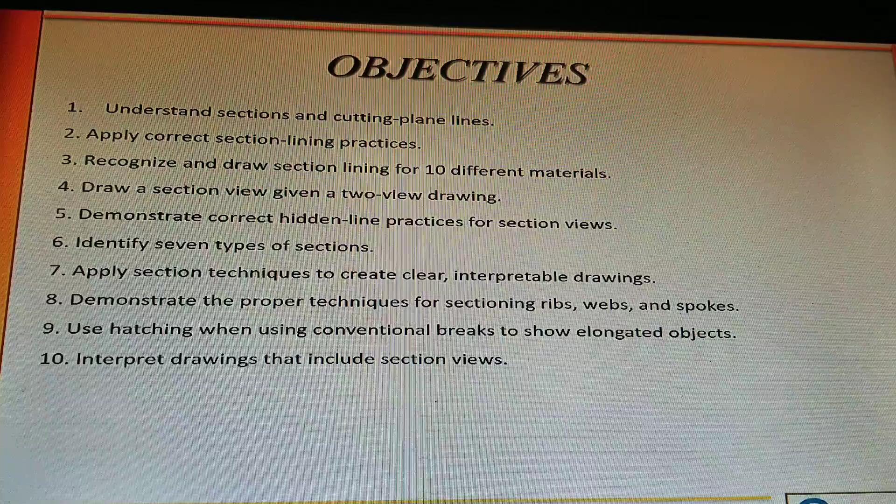Understanding sections. Section views are used for 3 main purposes. One is to document, design, and manufacture single parts that are manufactured as one piece, to document how multiple parts are to be assembled or built, and to aid in visualizing internal workings of a design.

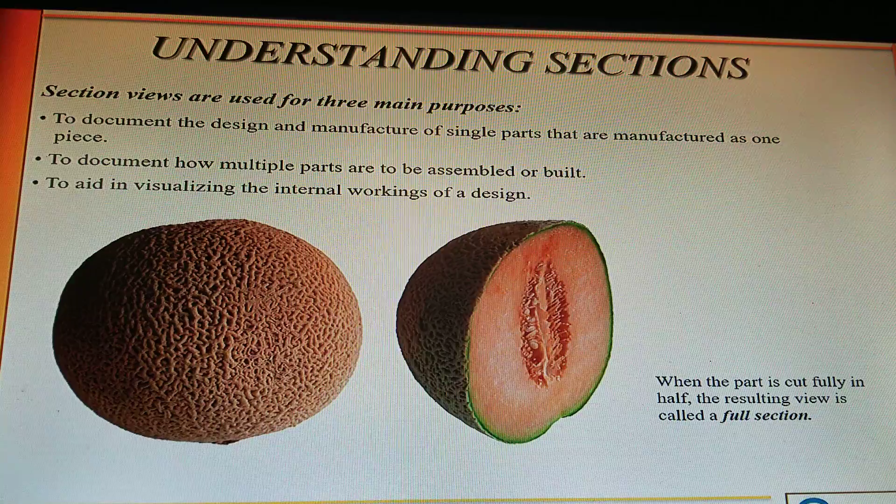So what they've got here is a melon, and they basically cut it in half. By cutting it in half, it's called a full section. So that little bit where the seeds are, that little hollowed out place, that would be an opening. And then around it, where the meat of the melon is, that would be your material. Okay. So this primary purpose is to be able to show the reader what something looks like on the inside without using hidden lines. Okay, it's a little bit more visually effective that way.

Make sure my camera's doing okay. I got 50 minutes. I don't know how long this will last. I'm doing it with my phone.

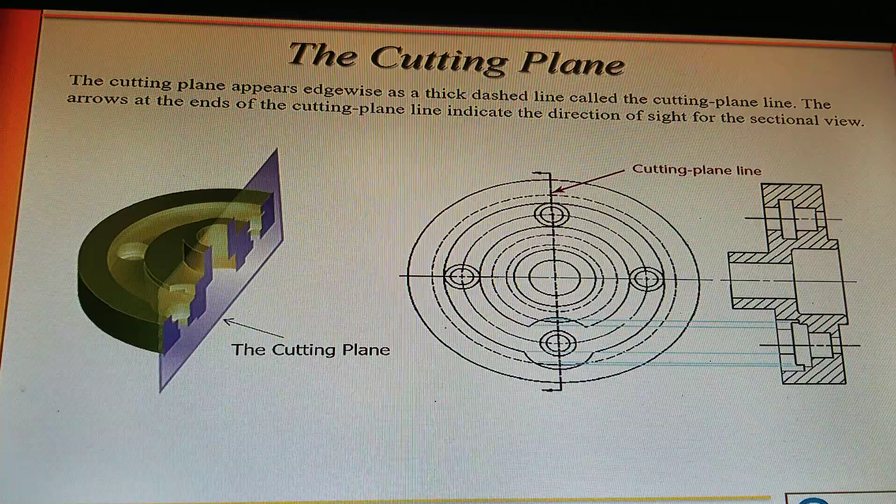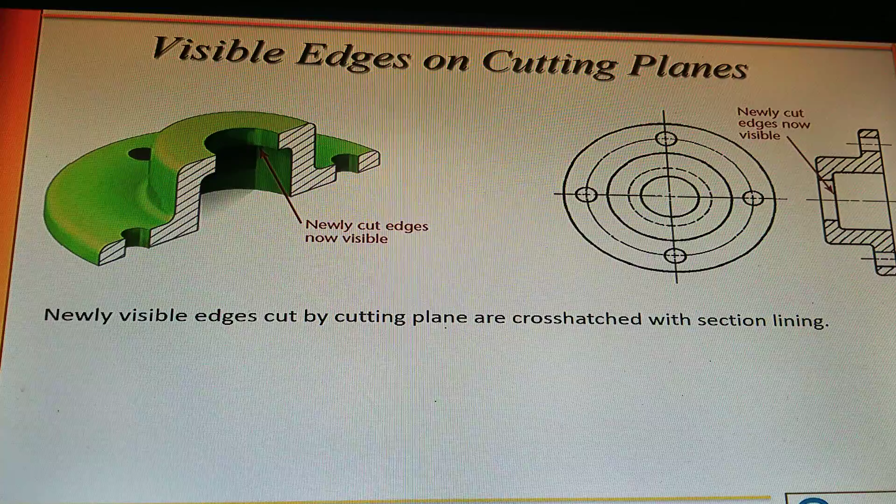Hold for a second. This is not very professional. I had to stop and get me a bottle of water. So my mouth is getting dry because I talk too much.

One of the things you got to remember: in drafting, these are called section lines. In AutoCAD, it's called hatching. So remember that.

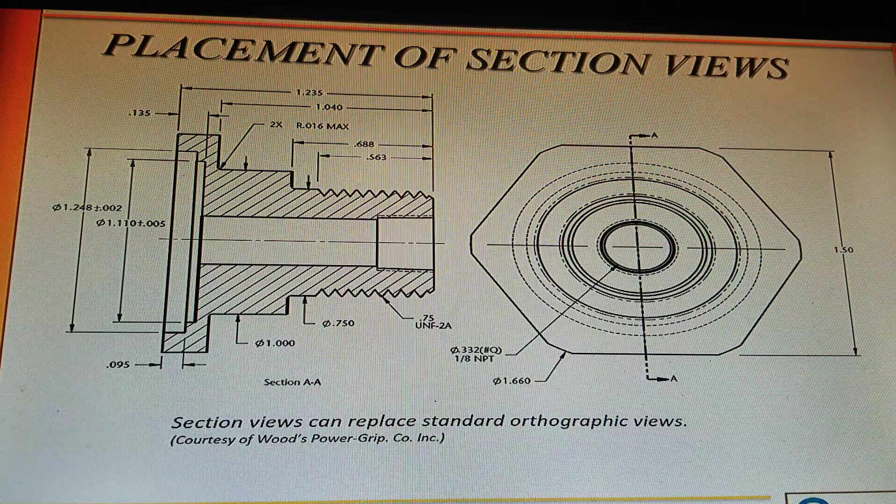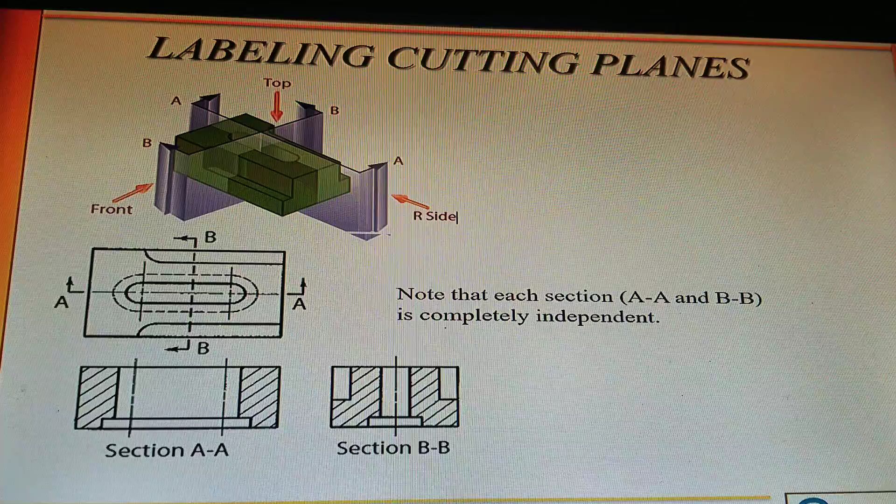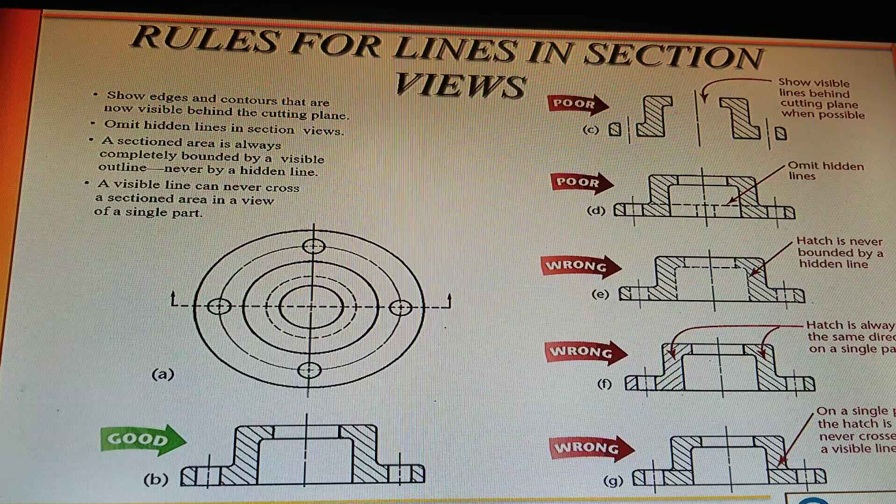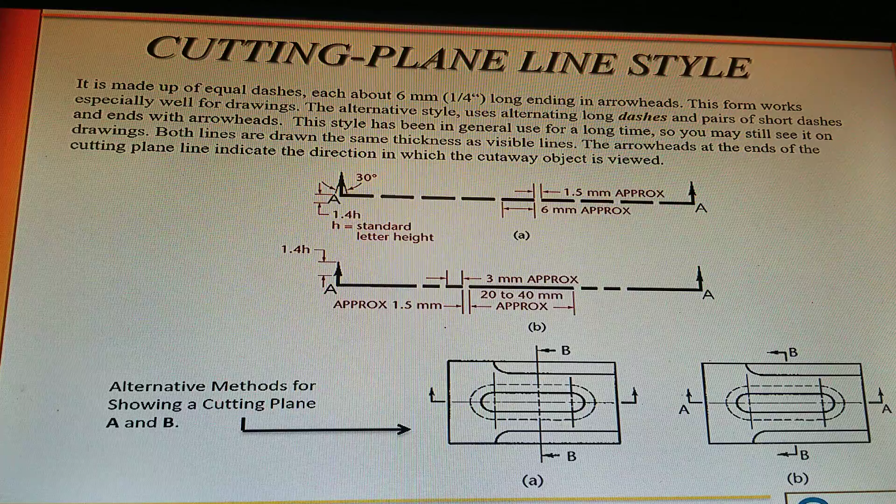Okay, some more do's and don'ts. One on the left is good. Look at the isometric above, and then look at your orthographic drawing, which has got a front view and a side view. In the middle there, it's wrong because you've got your arrows turned, and the isometric drawing should be on the left instead of the right.

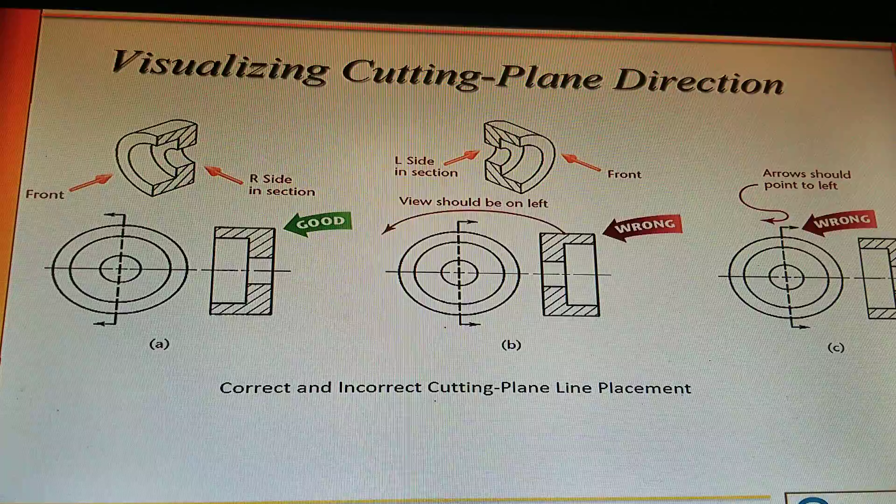And then on the right, on letter C, you've got your arrowheads pointing in the wrong direction. Okay, this slide basically pertains mostly to your old board or manual drafting days. AutoCAD pretty much takes care of most of these issues.

First one is uniformly spaced by an interval of about 2.5 millimeters, not too close together. Uniformly thin, not varying in thicknesses, distinctly thinner than visible lines, and neither running beyond nor stopping short of the visible outlines. So if you look at the right there on top, you see the correct way of drawing section lines or hatching on a section drawing.

Down below, all the no's, that's just different ways, especially back in the olden days, these would be things that would happen when you're drawing with a pencil. Spacing gets irregular, drawing lines too close. Now, even in AutoCAD, you can have them spaced too close together, so you got to watch your spacing. But pretty much, I think the default takes care of that too.

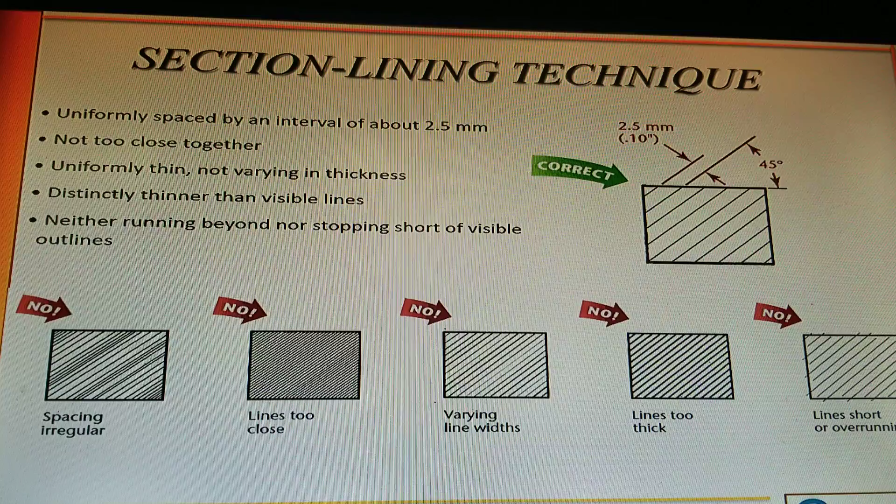Section lining technique continued. When you got some weird angles in your drawing, things are going to happen. Most of the time, your section lines or hatching are going to be at a 45-degree angle. But because of this weird angle in this part, they've adjusted the section lines to a 30-degree angle instead of a 45. In the middle there, they don't want your section lines to be parallel to the outline. And the last one, lines should not be perpendicular to the outline either.

Down below, they got best practice when you're dimensioning. When you're putting extension lines and dimensions, you'll learn more about that in chapter 11 when we do dimensions. You put your dimensions down below outside the sections. In the middle there, it's okay, there's a way of doing that, but try to avoid that if possible. And then on the right hand side, where your section or hatching is crossing the dimension, that's a no-no. Don't do that.

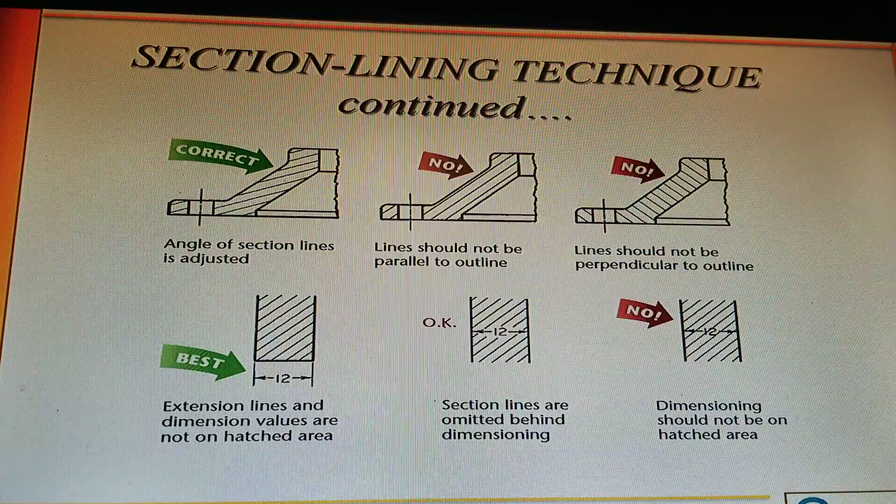Now, even in the old manual board drawing days, you could do this, but it takes a lot of time. In AutoCAD, all you got to do is pick one and click on it, and it'll make your sections. So these are different symbols for different kinds of materials. The one in the upper left, cast or malleable iron and general use for all materials, that's just the default. You can use that for anything. But you also can be specific for cast or malleable iron.

Then you have number 6 there, rubber, plastic, and electrical insulation. Number 11 is electric windings, electromagnets, and resistance. Then you have sand, steel, cork, felt, concrete. If you're going into architecture, you'll need to know how to draw the concrete. Water and other liquids, bronze, brass, number 3 there. Number 8 is sound insulation.

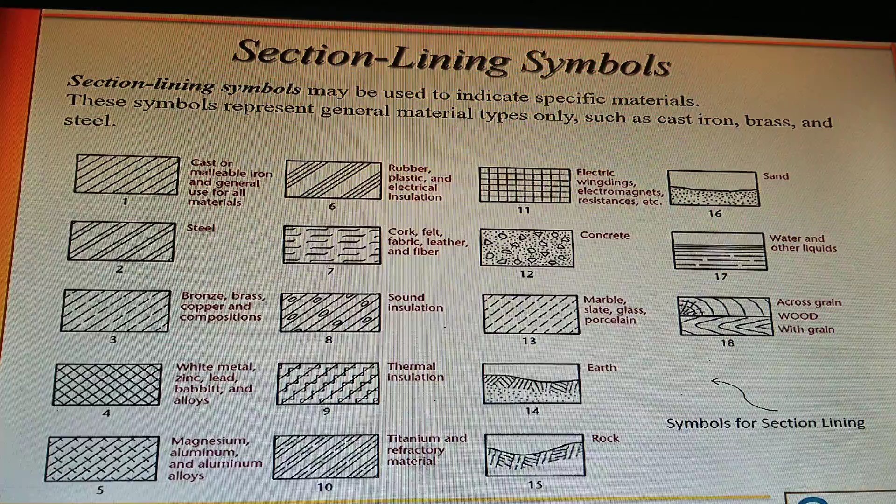Number 13 is marble, slate, glass. Number 18 is wood. And then you have white metal, thermal insulation, earth. Okay, there's even section symbols for earth. Magnesium, titanium, and then last is rock. You can put rock in there. These are not all of the symbols either. This is just the basic ones, okay? Okay.

Section lining in CAD. Okay, now we're going to talk a little bit about CAD. CAD programs usually include libraries that allow you to select from a variety of section lining patterns, making it easy to use different patterns, angles, and scales for the spacing of the pattern. Okay, on the left there, this is a wall section. It's the ductwork. It's a vent. It's dampers. You can open and close. It's got a little motor there, an access door, I guess, for you to work on the damper motor if you have to.

But down below in the green, where it's really dark green, it's saying the section lines are too dense. So you're going to have to adjust that. And then you go above it, and it says the section lines are too sparse. That means they're too far apart. They need to be close together. So somewhere in a happy medium there between the bottom and the top would suffice.

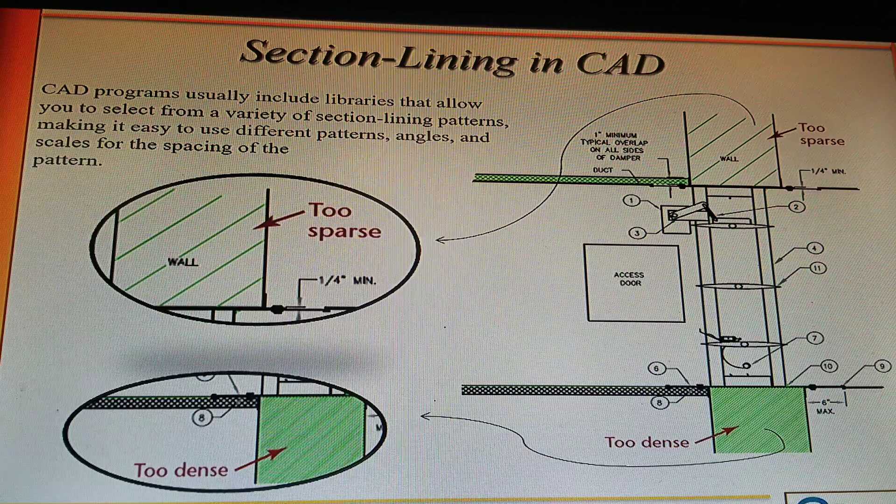Half sections. You can do half sections. Remember at the beginning we cut this melon in half, and we called it a full section. Well, we cut a quarter out of this melon, and we called it a half section. So symmetrical objects can be shown effectively using a special type of section view called half section. A half section exposes the interior of half of the object and the exterior of the other half. This is done by removing 1/4 of the object.

Okay, so if you look down below there on the left, the cutting plane, only 1/4 of that drawing has been cut away. Okay, so when you draw it on the right side, the half section, half of it looks like a normal orthographic drawing. Okay, and the right side is your section drawing. So you get both. You get the best of both worlds. You got a section on one side, and you got the orthographic view on the left side.

And notice how the cutting plane line goes too. It doesn't go all the way through. It actually starts at the middle of that circle, the bottom quadrant of that circle at the top, and goes up to the center and then to the right, and then the arrowheads on the left, or on the right, I'm sorry.

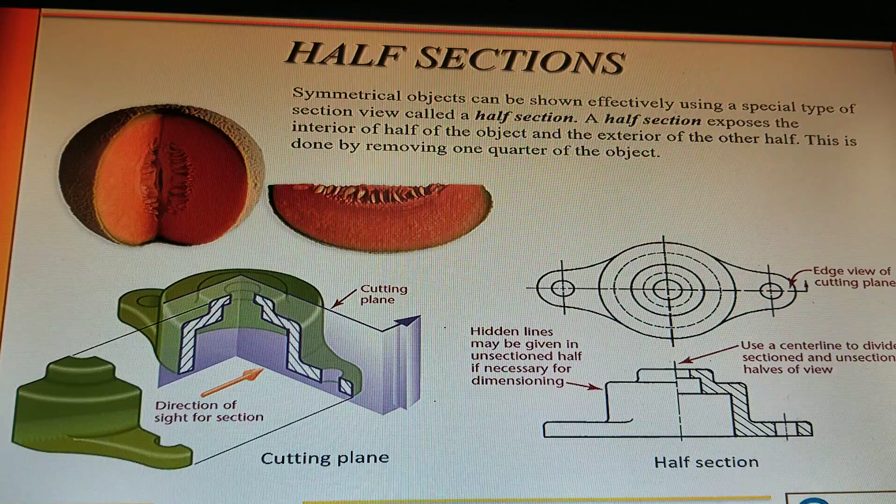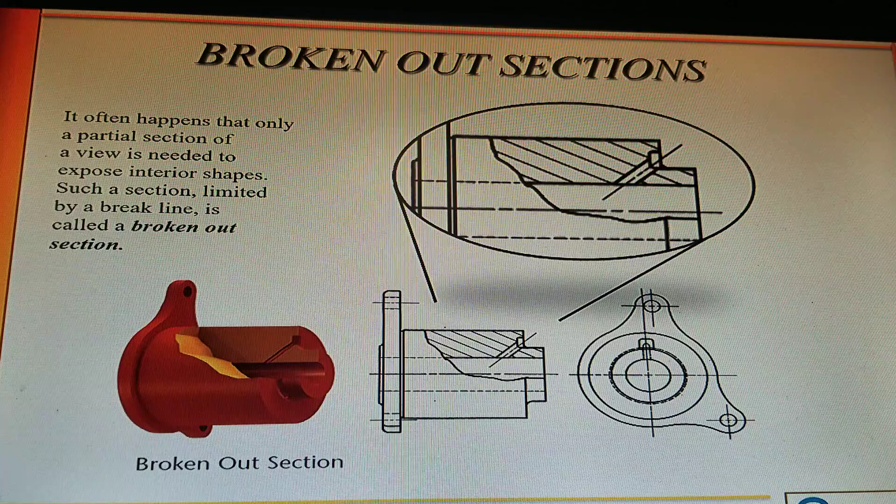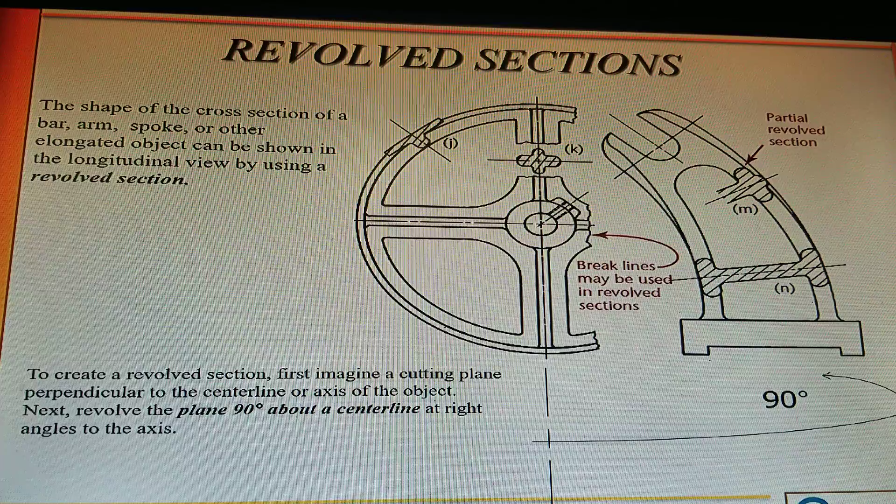To create a revolved section, first imagine a cutting plane perpendicular to the centerline or axis of the object. Next, revolve the plane 90 degrees about a center line at a right angle to the axis. So all they're doing is rotating that section. You're putting your section line in there, and you're rotating that shape inside there. So it would show that, I don't know, looks like an eye. So on the right hand side. Okay.

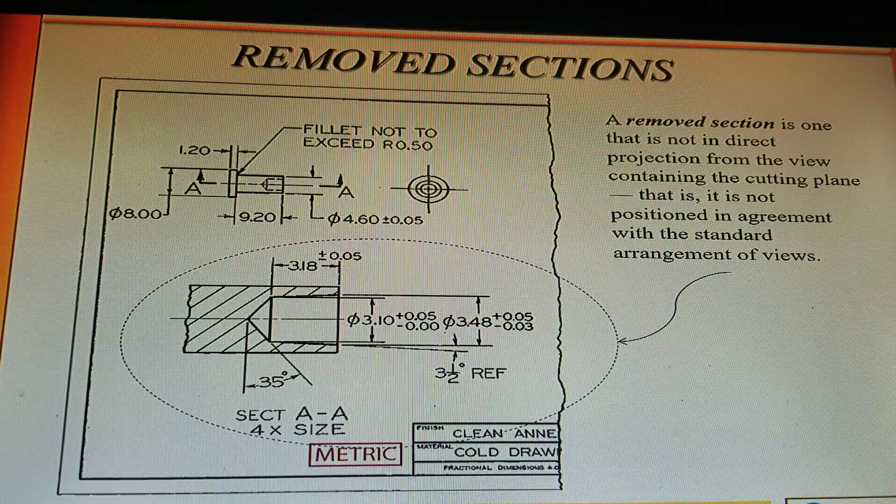Removed sections. Okay. A removed section is one that is not in direct projection from the view containing the cutting plane line. That is, it is not positioned in agreement with the standard arrangement of views.

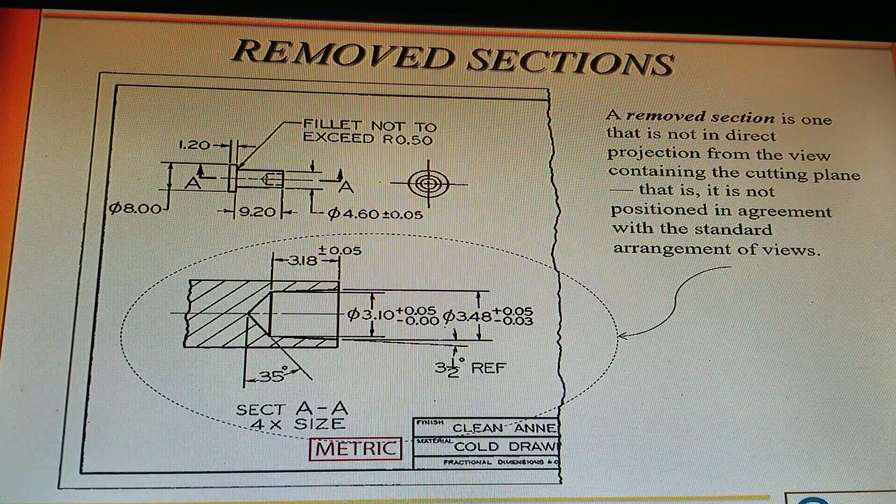So here they've got a little drawing on top there, and it's got a little section A-A cutting plane line going through it. And then down below, they've got that same drawing in section, and instead of being full size, it's 4 times the size. They did that to scale it up so they can put the dimensions in there so you can see them properly. Okay.

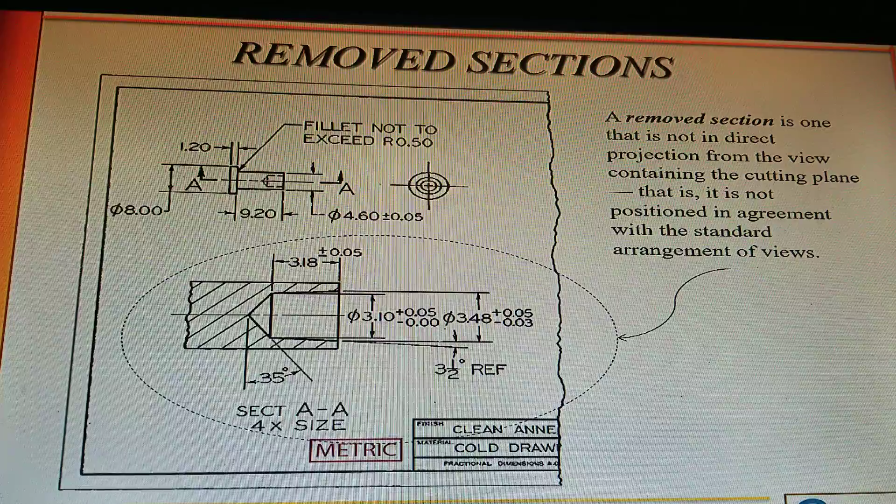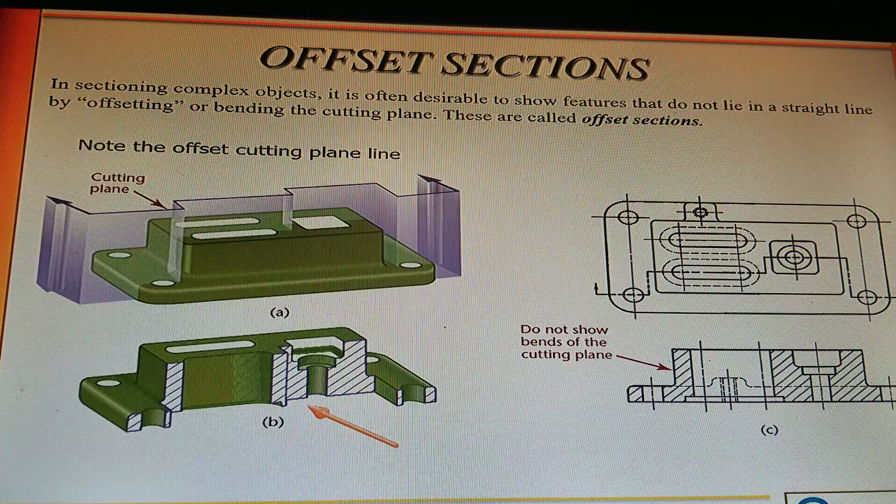Okay. The only thing I see on there that they tell you earlier not to do is put hidden lines in there. And so I don't know why they put those hidden lines in there. I guess there's a reason for it.

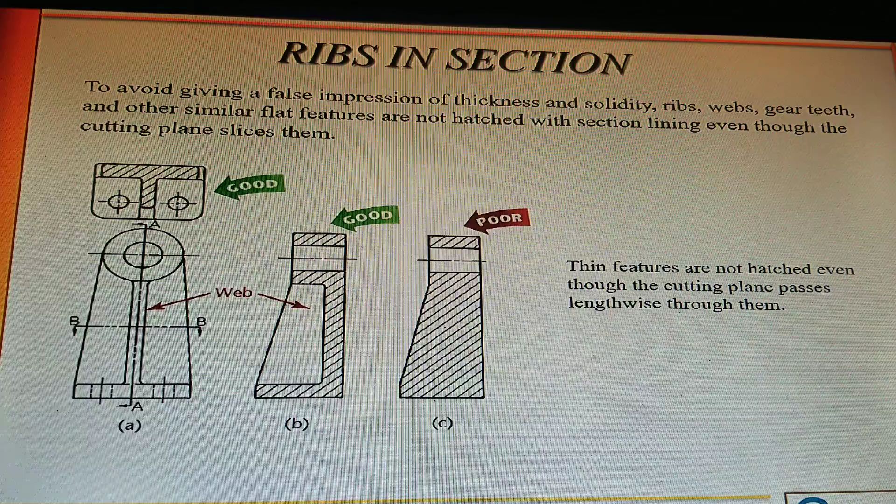You're not supposed to section that web, that little piece of thin metal between that circular hole on the front view and the bottom there, that plate that goes across. That part that's in between there is called a web, and you're not supposed to section that. Okay? Hope that makes sense.

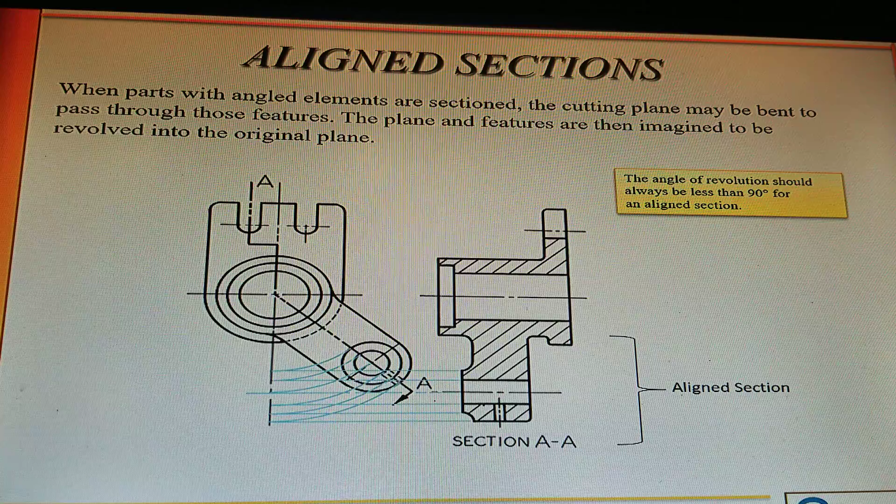Aligned sections. Now, this drawing would be a very confusing drawing if you drew it in its proper location. So what happens here is when parts with angled elements are sectioned, the cutting plane may be bent to pass through these features. The plane and features are then imagined to be revolved into the original plane. The angle of revolution should always be less than 90 degrees for an aligned section.

So if you look at the front view on the left, what they're pretending they're doing is revolving that bottom piece down vertically, and then they're projecting their lines over and drawing that bottom piece that way. There would be a lot of lines, and it would be mass confusion of lines if you do it the right way. In this case, to clear up and make it more understandable, they pretend they rotate that piece down and project lines over and draw it in like they've got it in the right view there. Make sense?